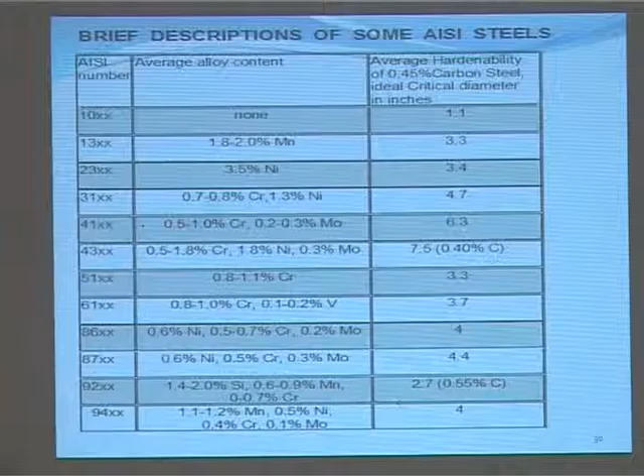4.4 inches you can harden throughout, 2.7 inches, 94 which contains manganese, nickel, chromium and moly for 4 inches diameter.

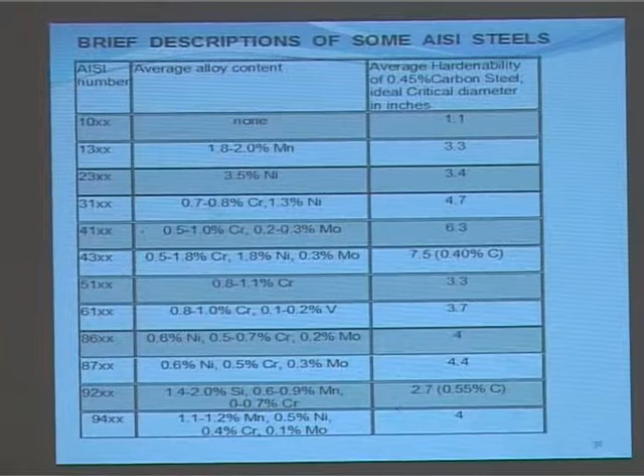This is why the alloy steel is developed, so that hardenability of the steel increases. Here is a graph which is showing all the details.

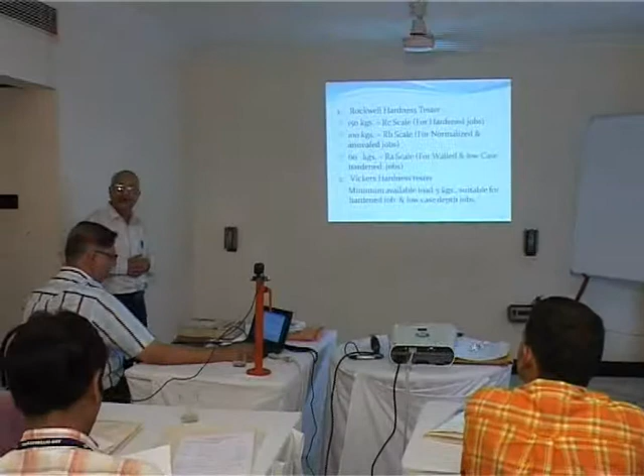Now we have done normalizing, we have done hardening, we have done tempering, we have done austempering, we have done martempering. We know the iron carbon diagram, we know the TTT diagram.

Now for hardness checking, we have got a Rockwell hardness tester available with us. At 150 kg load, we have got the RC scale. It is used for hardened jobs.

At 100 kg, we have got the RB scale where a steel ball is there. For normalized and annealed jobs, you have to use RB.

At 60 kg, again a diamond is there. RA scale for thin walled and low case hardened jobs. When case depth is very low, do not check with RC, because at 150 kg load the diamond indenter will go inside and will not check the surface hardness, but it will check the core hardness. And there will be fights between production and quality control.

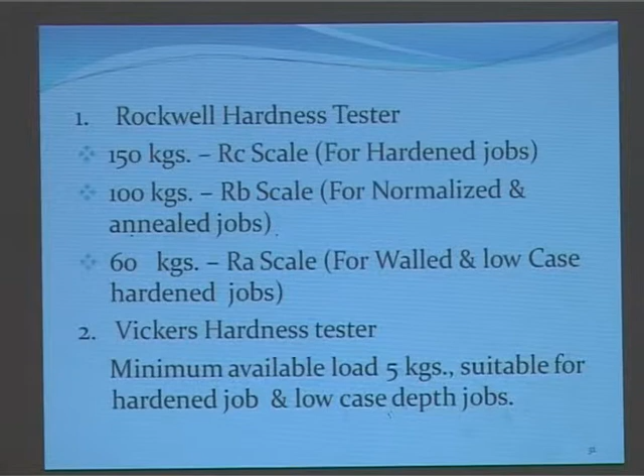Now we have got another hardness tester available with us, known as the Vickers hardness tester. The minimum load available normally is 5 kg, suitable for hardened jobs and low case depth jobs. On VPN number, you can check at 5 kg, 10 kg, 15 kg.

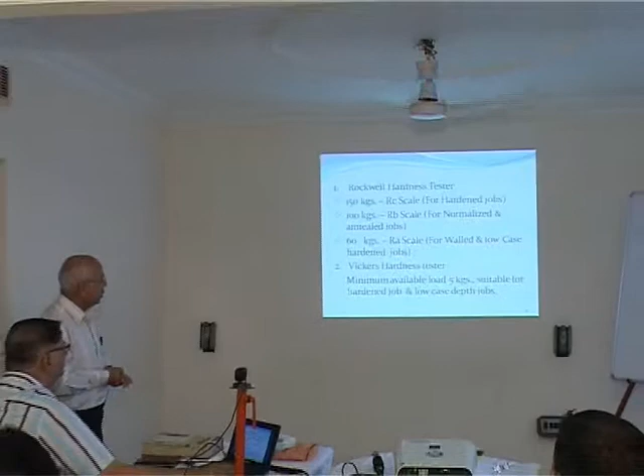Now we've got the Brinell hardness tester, suitable for normalized, annealed and soft jobs. Sometimes the Vickers and Brinell hardness testers are combined, 2 in 1.

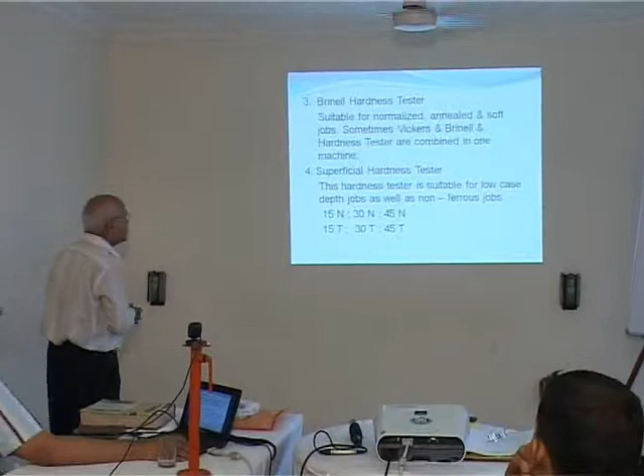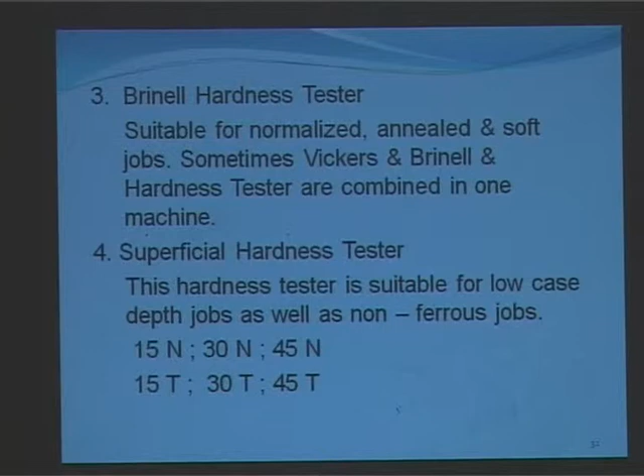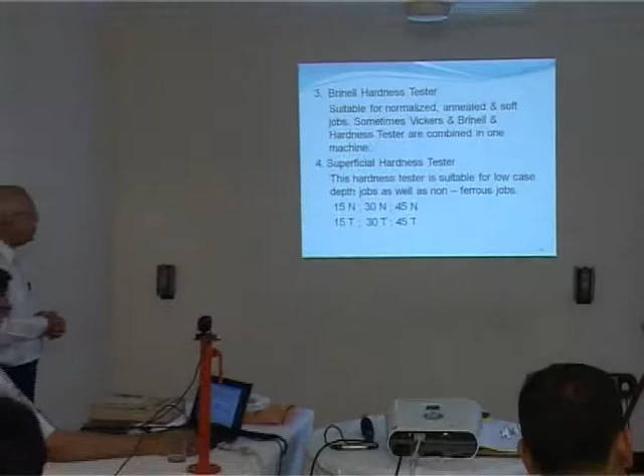We've got another hardness tester available with us, known as the superficial hardness tester. This hardness tester is suitable for low case depth jobs as well as non-ferrous jobs. 15N, 30N and 45N, this is the indication - you've got 15 kg load, 30 kg load, 45 kg load. For non-ferrous jobs, you've got another scale available in the machine: 15T, 30T, 45T. For non-ferrous jobs - aluminum, copper, brass, lead - you can use the same hardness tester to check non-ferrous jobs.

Now we have sometimes available with us a portable hardness tester, suitable to check jobs when they are very heavy, or when the inspection is to be done at site. You have done heat treatment, you have supplied to some customer, and they complain there is no hardness - so you take a portable hardness tester, go there and show that the hardness is correct. Or when structures are very big, you cannot mount them on a hardness testing machine, you have to have a portable hardness tester, something like a portable X-ray.

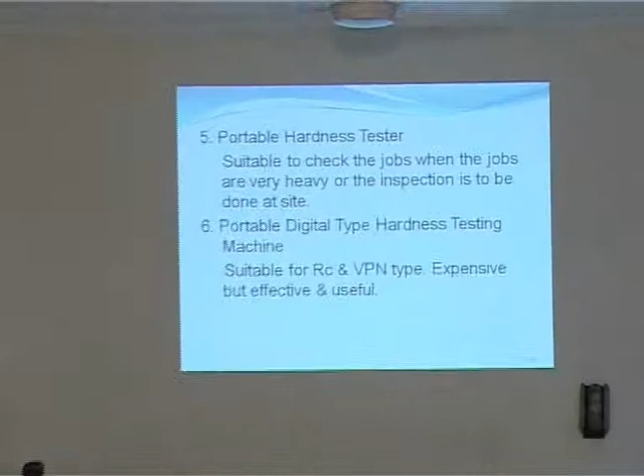When the patient is not able to move, a portable X-ray can go to the patient. Similarly, portable digital type hardness testing machines, suitable for RC and VPN type, are expensive - working on the Poldi machine, Poldi principle - and these imported machines are also available.

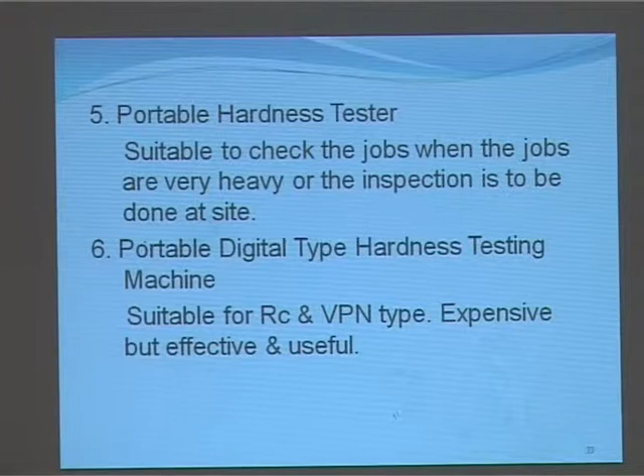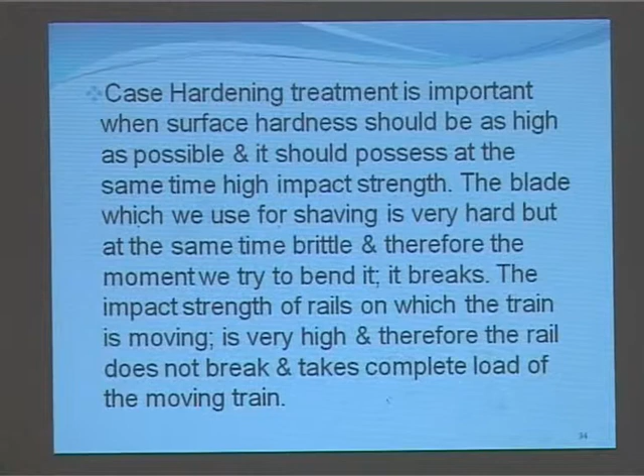Case hardening treatment is important when surface hardness should be as high as possible and it should possess at the same time high impact strength. Like when a train is passing, the rail has to have a lot of impact strength, while at the same time we need wear resistance.

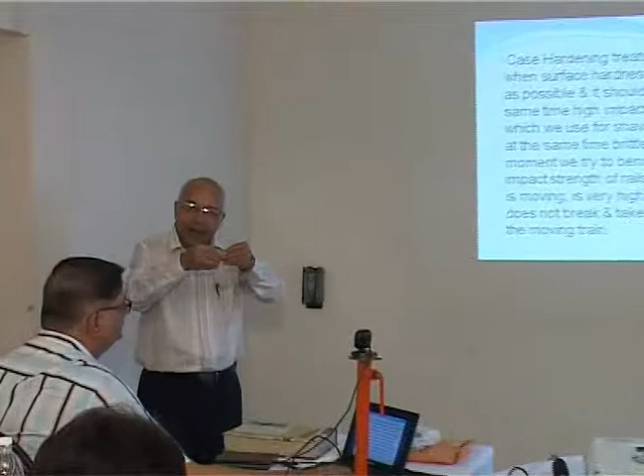A blade is very hard - when we are shaving, the blade is very hard, but the moment you try to bend it, it breaks. So in case hardening, the case should be as high hardness as possible and the core should be tough, not soft. So that tough core and high surface hardness combine with each other and give you both impact strength and surface hardness - 2 in 1 operation.

The blade we use for shaving is very hard but at the same time very brittle, so the moment we try to bend it, it breaks. The impact strength of rails on which the train is moving is very high, and therefore the complete rail does not break and takes the complete load of the moving train.

When you are standing near a station and the Rajdhani is going, you know what type of abuse the track is taking continuously. Local trains are running day and night, but you hardly see these rails being changed - and if they have to take maintenance, it causes a lot of inconvenience and people suffer.

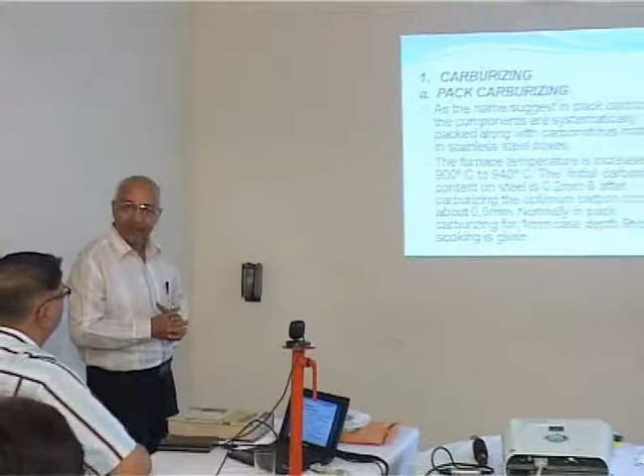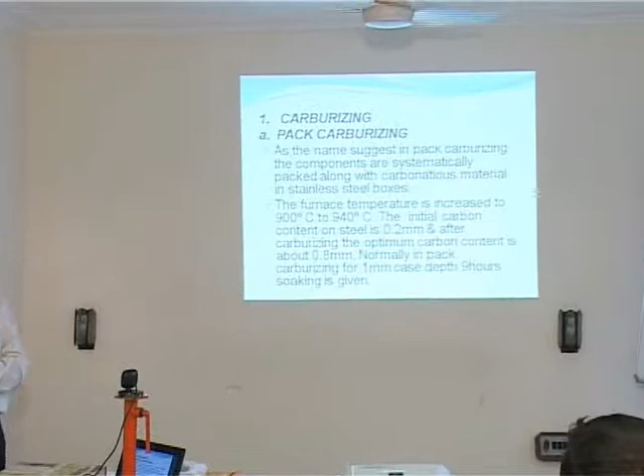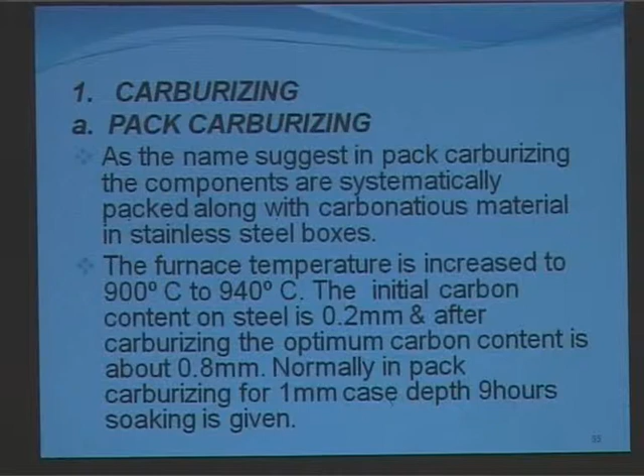Now we are coming to the second part, that is carburizing. What is carburizing? The initial carbon content of the steel is 0.2, and after carburizing the carbon content should go to 0.8. Why 0.8? Because we have seen the iron carbon diagram. At 0.8 the austenite region starts from 723 plus 50 degrees, meaning at about 780 degrees the austenite range is available. So 0.8 is our objective for case carburizing, and the initial carbon content should be 0.2.

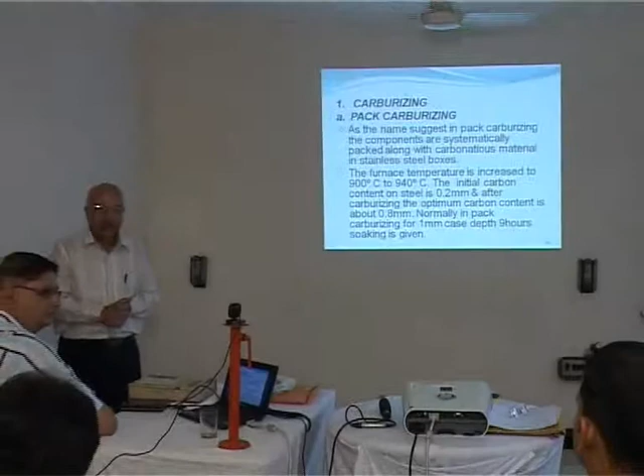Is anybody doing carburizing here? One gentleman, you said carburizing — which steel grade? 16 mm, you remember? 16MnCr5, that means 0.16% carbon. It contains manganese as well as chromium.

Now in carburizing we have three branches available with us. One is pack carburizing. As the name suggests, in pack carburizing the components are systematically packed along with carbonaceous material in stainless steel boxes. Normally this is done at 900 to 940 degrees centigrade. As already indicated, the initial carbon content is 0.2 and after carburizing it should be 0.8. Normally, for 1 millimeter case depth, 9 hours of soaking is required.

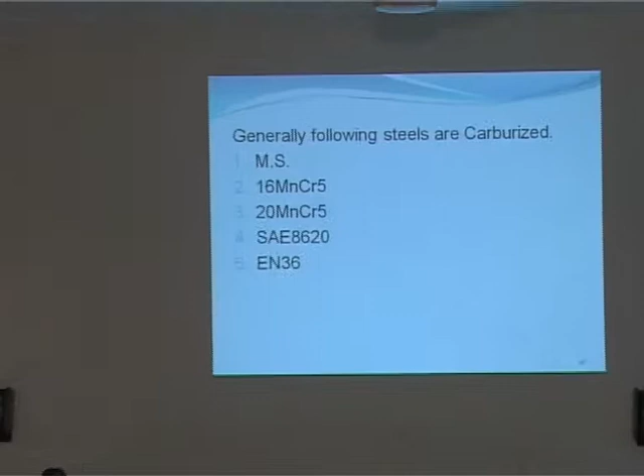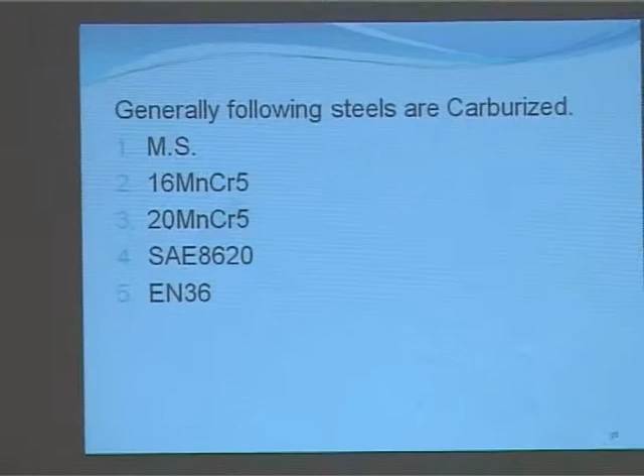These are the steels which we normally pack carburize: MS, 16MnCr5, 20MnCr5, SAE 8620, EN36. What is SAE? Society of Automotive Engineers. They designed this series, hence the name SAE. AISI we have already defined.

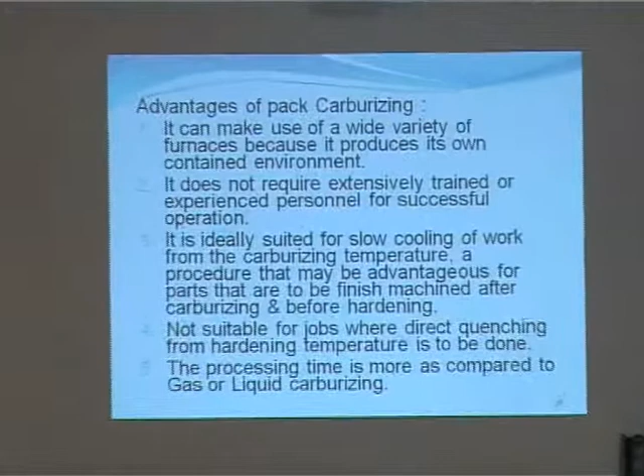Now pack carburizing has some advantages as well as disadvantages. We will not go in detail on advantages and disadvantages because pack carburizing nowadays is an outdated method. We have covered it in our lecture just to make your understanding clear.

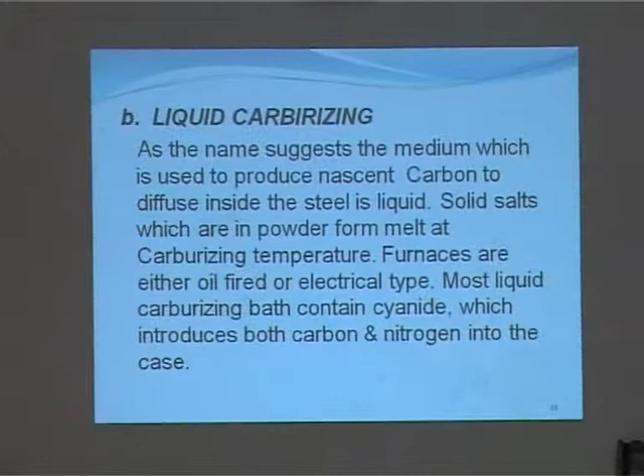We have liquid carburizing available with us. As the name suggests, the medium used to produce nascent carbon to diffuse inside the steel is liquid. Solid salts in powder form melt at carburizing temperature. Furnaces are either oil fired or electrical type. These liquids introduce both carbon and nitrogen into the case — some nitrogen is also going in.

Now the advantages of liquid carburizing: it is very, very economical. Does anyone here have a salt bath? Salt bath operations are very economical. If you have a private salt bath and you are doing liquid carburizing or hardening in the same furnace, you can make more profits. It's very economical. If you want to become rich in life, you can go for this method.

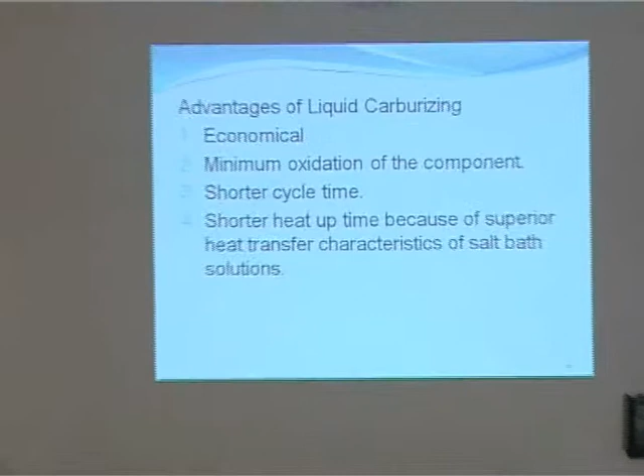Of course, what else? Minimum oxidation of the component. The component is dipped into the liquid. The only time it can come in contact with oxygen is when you are quenching, but even then some layer of liquid is still there. So whenever you are doing liquid hardening or carburizing, oxidation is not there.

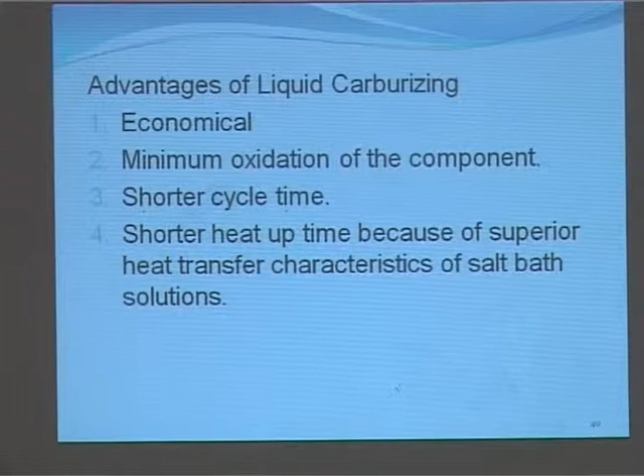What is oxidation? Whatever air is available in the environment or in the furnace reacts with carbon, and if decarburization is taking place, your hardness will go down. If your hardness is going down, check whether decarb is taking place. But with salt bath, that risk is not there. Cycle times are very short — shorter heat up time because of the superior heat transfer characteristics of salt bath solutions. So salt bath is very, very economical.

Now what are the disadvantages? Every process will have its own advantages and disadvantages. It's not a very clean process — you agree with me? Yes, sir. Not very neat.

If you go to heat treatment, everybody will say, I don't want to go to a treatment shop. Few salts are injurious to health, so people who are working may damage their health. Waste treatment of salt is not followed by many factories and hence it is not environment friendly. Are you doing any waste treatment? Are you following it?

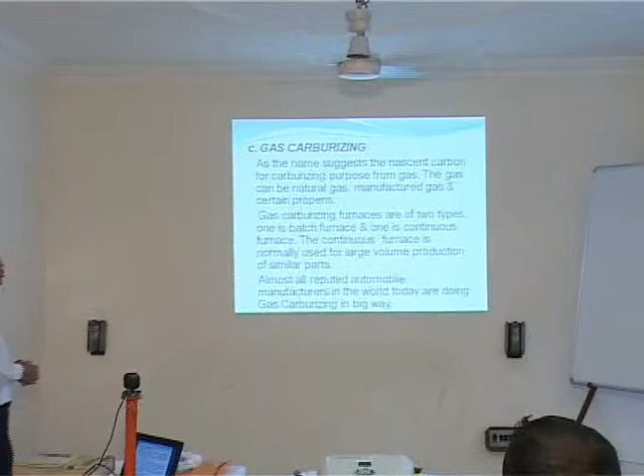Okay, next. Now we have gas carburizing available with us. We have seen pack carburizing, we have seen liquid, now we are coming to gas. Gas is very, very popular all over the world. All automobile industries are doing gas carburizing. As the name suggests, the carbon for carburizing purpose comes from gas. The gas can be natural gas, manufactured gas, or propane.

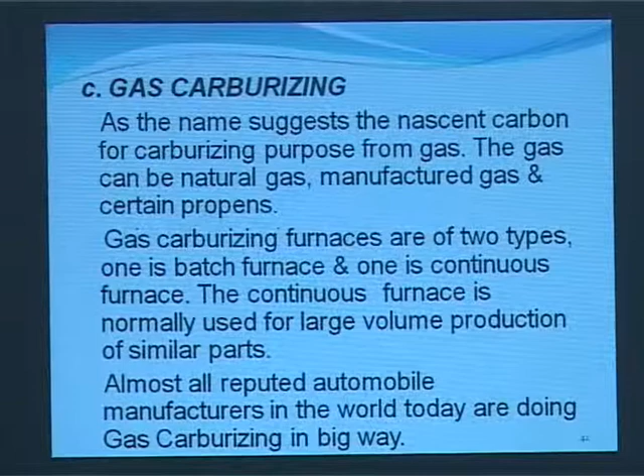Gas carburizing furnaces are of two types: one is batch type, one is continuous. The continuous furnace is normally used for large volume production of similar parts, normally automobile parts. Almost all reputed automobile manufacturers in the world today are doing gas carburizing in a big way.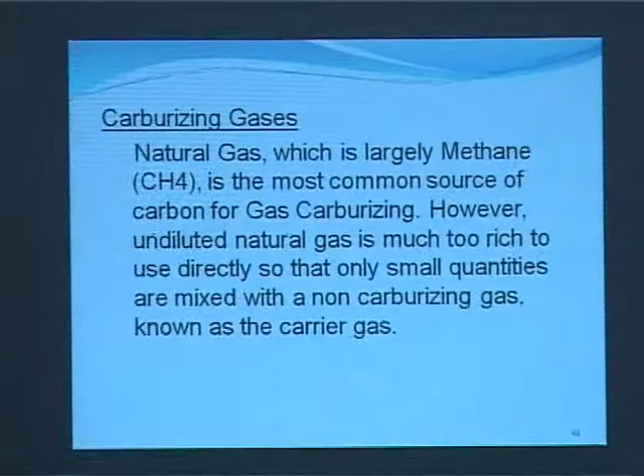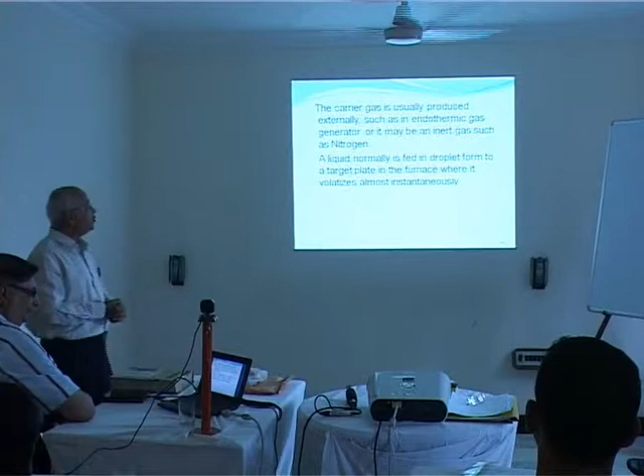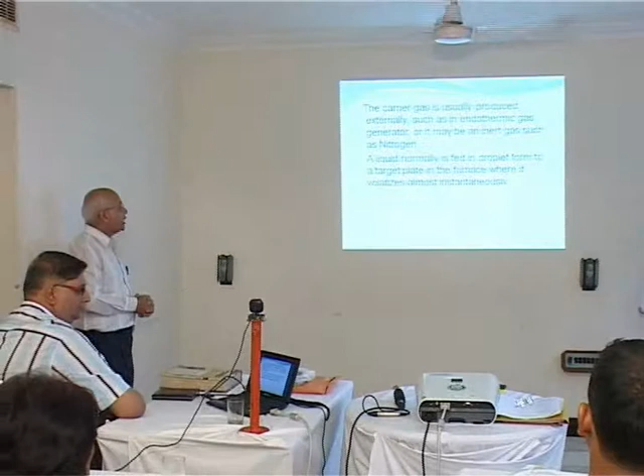Next, carburizing gases. Natural gas, which is largely methane (CH4), is the most common source of carbon. Undiluted natural gas is too rich to use directly, so only small quantities are mixed with a non-carburizing gas known as carrier gas. The carrier gas is usually produced externally, such as an endothermic gas generator, or it may be an inert gas such as nitrogen. A liquid is normally fed in droplet form to a target plate in the furnace, where it volatilizes almost immediately.

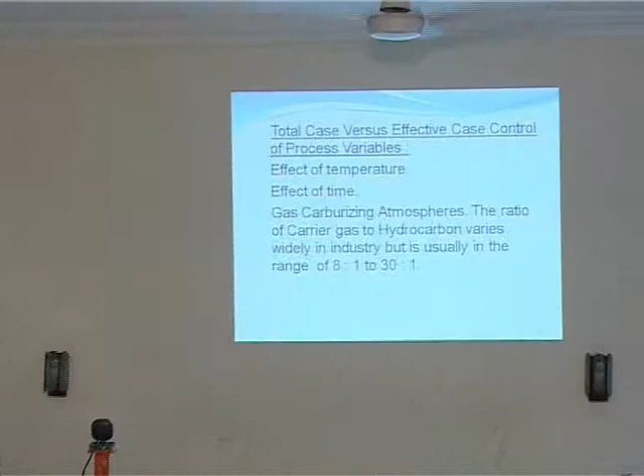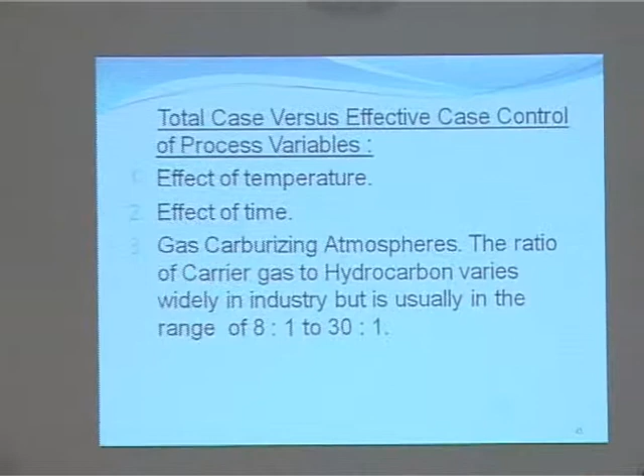Now, total case versus effective case. What is total case and what is effective case? We should define it correctly. The total case is from surface hardness to the core hardness. What is the effective case? Suppose the outside hardness is 62 RC and where that point ends you get 50 RC, that is effective. Whenever you are writing case depth, kindly write clearly in the drawing whether it is effective or total.

Most people do not understand the definition of case depth. There are two types: one is effective and one is total case depth. Total case depth is surface hardness to the core hardness. Effective case depth is from surface hardness to 50 RC.

Now, as we know carburizing is controlled by temperature. Higher the temperature, the carburizing rate is faster, more penetration of carbon inside, taking less time. For time, temperature, gas carburizing atmospheres, the ratio we normally maintain is 8:1 to 30:1, that is carrier gas to hydrocarbon gas. This varies from company to company.

While doing this operation, control of carbon concentration is very important. If the carbon concentration goes above 0.8, normally you get cementite in the network, which is again injurious to the health of the steel. Because the amount of water vapor available in the furnace atmosphere is directly related to carbon potential, dew point has been the most commonly used method for carbon potential.

Anybody doing gas carburizing? Are you maintaining this dew point? Very good. However, there are several other control systems including infrared analyzer, dew point analyzer, oxygen probes, and hot wire analyzer. Any of these systems may be utilized to control the carbon potential automatically within pre-established limits. Are you controlling automatically?

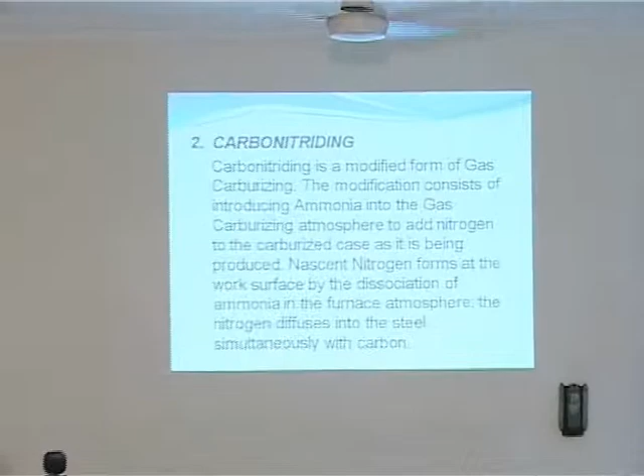So if you go to Mahindra & Mahindra, they are doing carbonitriding on automobile components, purging inside carbon as well as ammonia gas. NH3 dissociates into nascent nitrogen and nascent hydrogen. Hydrogen goes into the environment, and nascent nitrogen along with nascent carbon diffuses inside the steel. So you are diffusing two elements, one is carbon and one is nitrogen.